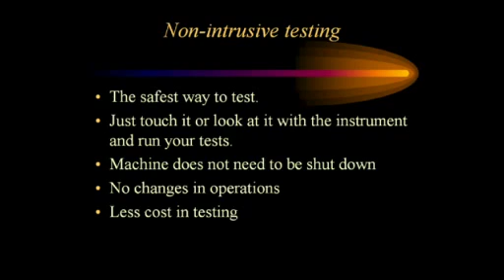I've used ultrasound in every one of these applications. Now, I'm not going to sit here and bore everybody talking about every application, but you can see by thinking outside of the box and thinking what could be there, you start to hear things and you start to see things that you haven't been able to do before.

Compressed air leaks - the biggest bang for your buck with ultrasound. I can go into a plant and pay for the survey, pay for the whole predictive maintenance program. In a lot of cases it can be paid for just by fixing their air leaks, the money they will save. Biggest bang for your buck. I would really recommend somebody really look at that one hard.

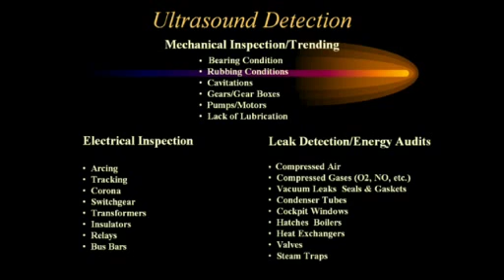Bearing monitoring, condition monitoring, bearing rubs, pump cavitation, gearboxes, pumps and motors, lubrication - it just goes on and on and on. And once you start to think and start to imagine things outside of that box, a lot more of these things open up to your mind to see what's going on. Whoops, went one too far.

So there are some things in our programs that we install in facilities that we recommend they do prior to hitting the start button. The first thing we want to do is pull the grease tubes out of the motors and verify that the motors have been greased. In today's world with EPA and environmental protection, most motors are shipped dry. Now, the motor company doesn't tell you that. And there's a reason they ship dry.

Some people are using a moly-based grease, some people are using a poly-based grease. Those two, moly and poly, don't get along. The two of them mixed together form an acid that will eat the race out of your bearings in 3 to 5 years. So we don't want to mix the two. So to get rid of the problem of mixing the two, motor companies don't grease the bearings.

Consequently, in the last 6 months, I've found 50 motors that we pulled the grease tubes out of - they're dry, they're empty. People get a new motor or a rebuilt motor, they take it off the crate, install it, align it, hit the start button, assuming it's a brand new motor and ready to go. Well, it's not. We have to make those motors ready for service.

Very, very important - the next thing is a shaft run-out test. We take a dial indicator, a magnetic stand, set it up on the shaft, and roll that shaft over from the keyway all the way around to the other side of the keyway. If that dial indicator moves more than 0.003 of an inch, we will not accept the motor. The shaft is bent, or it's not in there straight, or something is wrong because it moves more than 0.003 of an inch.

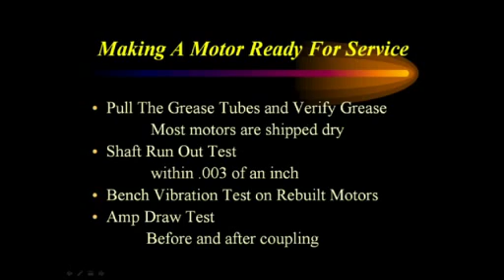Some of the problems that can be detected with infrared or ultrasound: soft foot. For those who don't understand what soft foot is, the plate or base that the motor sits on is supposed to be milled even, and the feet on the motor are milled even. Well, sometimes you have a three-legged stool — you set a motor down, and even though it feels solid, there's actually a little bit of a raise on one foot or the other. So what we do is take dial indicators and find that soft foot. The next slide will show us that.

Then there's misalignment. Misalignment is very, very important. We talked earlier about 3/1000ths of an inch. Most business cards, if you put a mic on one, measure about 6/1000ths of an inch thick. So just think about that — center line to center line on alignment has to be less than half the thickness of a business card, in fact, because we want it inside of 3/1000ths.

Okay, we're going to look at some greasing problems today. One of my biggest pet peeves is greasing, and you will see that today. We're also going to look at some mechanical looseness, maybe some cavitation in a pump, and some competing noises that we will find. So let's move on.

This is the soft foot. This was found with ultrasound and infrared. Ultrasound, we looked at it first. What we heard actually was — I'm going to play it.

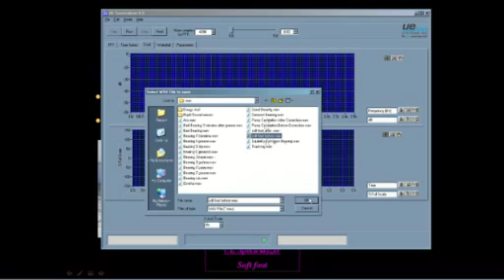Okay, we're going to play the soft foot before it was corrected. I want you to watch both screens and listen for the surge — you'll hear the surge in the motor running. Okay, here we go.

Okay, that's the surge in the motor. You could hear it, and you could also see it in the time domain — you see them getting bigger and smaller, bigger and smaller.

What happened — and I think most of you can see my mouse moving — this foot right here, the front foot on the right side, we put a dial indicator on the base and another on that foot, loosened that bolt, and that foot raised 0.010 of an inch when we loosened it. So we tightened it back down and went all the way around. The opposite corner, caddy corner across, also raised 0.010 of an inch. So basically, when we bolted that motor down, we put a twist in the case.

Now the twist in the case is noted right here — you see the heat in the motor? The tolerances inside that motor, between the rotor and the stator, are so small that a little bit of a twist in the case shows up pretty quick. You also hear it with the surge in there. Okay, this motor is too hot, and the hot spots are showing up in it.

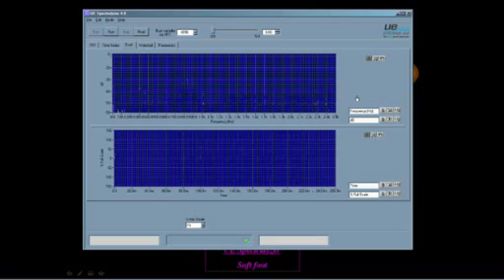So let's go back to our Spectralyzer and stop this one, and I'm going to play it after we corrected that. Now, for the correction, what most people would think is that you put 0.010 under that one foot. Well, that's not true — we put 0.005 under the front one, and go caddy corner and put 0.005 under it, because remember, the motor's tipping. That way we took it down square.

Now listen to the sound of it now.

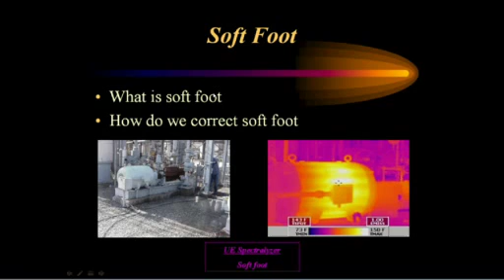This is a $23,000 motor, 2,300 volts, 300 horsepower, and it runs a 15-stage pump going into a pipeline. Very expensive machine that was fixed with two 5/1000ths shims. It's pretty prominent, pretty big deal.

So misalignment - it's been our experience that misalignment is the second leading cause of premature motor failure. What is alignment? A lot of people say, well, it looks square. I measured from hub to hub, and it's a half inch on both sides. Well, that's not good, that's not alignment. We're talking alignment to within 3/1000ths of an inch.

So what is alignment? We'll talk about that. How would it sound with ultrasound? How would we know that it's misaligned with ultrasound? How can we confirm the misalignment? What damage can be done through misalignment? Is it a hard test? Is it complicated? No. And can it add to the bottom line? Well, when we're talking about shutting down a $23,000 motor and a $150,000 a day pump, it certainly can add to the bottom line very quickly.

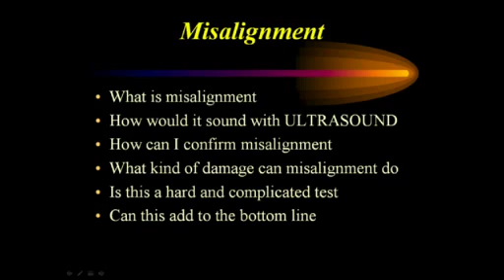So let's look at misalignment. Misalignment is when two separate machines are coupled together through a coupler, and the two shafts are not aligned to within 3/1000ths of an inch center line to center line. This places undue stress on the inboard bearings on both machines and severely shortens the life of those machines.

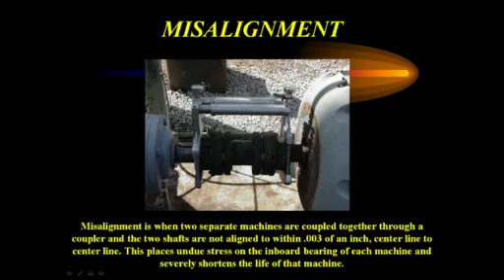For the sake of terminology, looking at this machine and the two bearings we see - this one here is the inboard bearing on the pump, this is the inboard bearing on the motor. The outboard bearing is where the fan is. The outboard bearing on the pump is where the impeller is. So the two inner bearings are the inboard bearings, for sake of terminology. Usually we have two inboard points.

How are we going to know with ultrasound? If we take an ultrasound reading on the outboard bearing of the motor, then one on the inboard bearing of the motor, then one on the inboard bearing of the pump, and outboard of the pump, the two inboard bearings will be noisier or louder than the two outboard. The reason for that is the stress we're putting on it through that coupler, because those two shafts are not aligned properly.

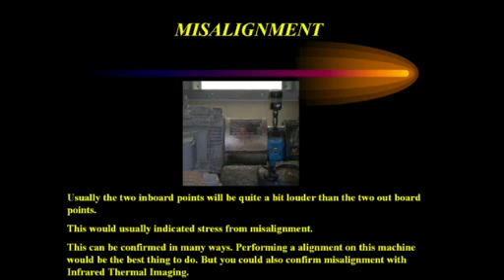How are we going to confirm it? Somebody's not going to just say, yeah, you're listening to it - there's no way you can tell. Well, we have other options. We have infrared, we have vibration, or we can simply realign the machine. There's several different ways that we can confirm what we're looking at. What we're going to do is use infrared.

We see here, this is the same machine. Notice the stress that's placed on the inboard bearings of both machines. Look at the heat here - the lighter the color, the hotter it is. So the stress on the inboard of both of these machines is tremendous. It's like trying to turn a hinge over - you've got it in a bind, and all the stress goes out that shaft straight into those two bearings, because that's the first give point. So it very severely shortens the life of this machine.

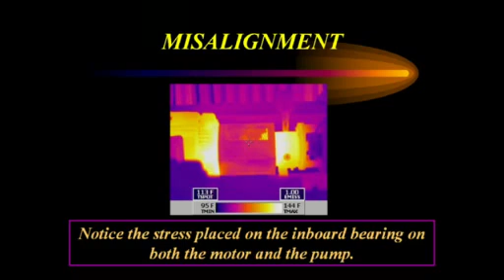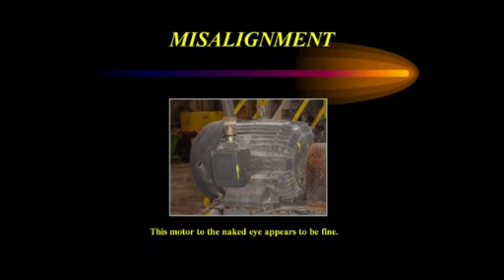Let's look at this one. This motor, to the naked eye, appears to be fine. Nothing wrong here, it looks good to me. Put ultrasound on it - the outboard bearing was quiet, the inboard bearing was very noisy. And going on across to the pump, the inboard bearing on the pump was noisy. So let's look at it.

Here we go. In testing with ultrasound, confirming with infrared, there's severe misalignment. Look at the stress put on the inboard bearings here. Look at the heat that we see on both of these bearings because this coupler is out of alignment.

There's several ways to align machines. Personally, I like reverse dial. Most people like lasers - laser alignment is fast, it's quick, it's accurate, it's very good. But I'm kind of the old turn it with my hands, screwdriver and wrench kind of guy, and I like to, if I have enough time, pull them down to dead zero.

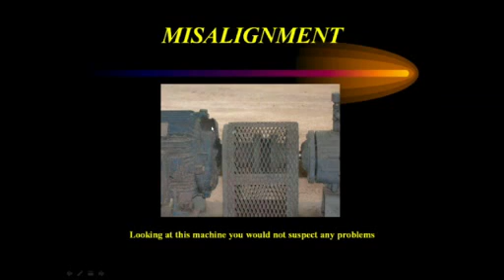Let's look at this machine. It looks like there's nothing wrong with it at all, except the bearing is hot. We can tell this bearing is hot because of the grease. Look at the grease running out of here. That's a telltale sign already, and we'll talk about that in a little bit. But this machine looks like it's okay.

Well, let's look at it under infrared. We see the stress on the inboard bearing here, the stress on the shaft getting hot here. Look at this. This is a Martin-style coupler, the one that has the little rubber gear in the middle.

Everybody's taken wire and bent it back and forth till it breaks. It gets hot. That's movement of the molecules. It's weakening it. That's exactly what's happening here. You have two hubs working that rubber, squeezing it, compressing it, letting off, compressing it, letting off. It just heats the rubber up. This is severe misalignment. When it starts making the rubber in the coupler hot, it's a bad deal.

So here we go, misalignment. Now we've proven misalignment with ultrasound because the two inboard bearings are louder than the two outboard bearings. We've also confirmed it with infrared. Vibration is going to show us the same thing.

If we go out to vibration, we show spikes on an accelerometer at 1 to 2 times running speed. Again, another indicator of misalignment. So very, very important, and it all starts with that shaft run-out test when that motor comes into the plant.

Very, very important. Look at this machine. There's not a problem, obviously it's got a few leaks. We can see where some process has been leaking out of it. And they just keep replacing, just keep replacing.

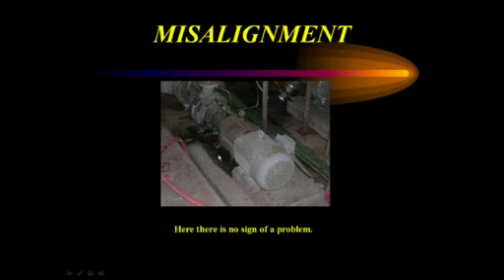Well, if we look at it now, we can see what happens. Look at the stress put into that pump from misalignment. This machine failed 3 days after these tests were run. The manager had the reports but chose not to use the information. It led to a plant shutdown, and of course, that was not planned.

Very, very important. Misalignment is the second leading cause, I stress that, the second leading cause of motor failure. I have actually aligned motors that you couldn't turn the coupler over with a pipe wrench. When we got done with alignment, you could lay your hand on top of it and let it fall off, and the motor would coast down to a stop because you've taken the stress out of those inboard bearings. It's very, very important.

Okay, so let's move on. Misalignment. Testing for misalignment is very simple. You must test the outboard and the inboard bearings for each machine. If the two outboard bearings are significantly quieter than the two inboard bearings, then we have a very good indicator of misalignment. If you suspect misalignment, try to confirm it with another technology such as infrared or vibration, or just simply realign the machine.

It doesn't hurt. Doesn't hurt. Machines will settle and move over time, so just because it was aligned to start with doesn't mean it stayed there. They will actually rise with heat, so they may be moving into misalignment. That's something we also need to look at.

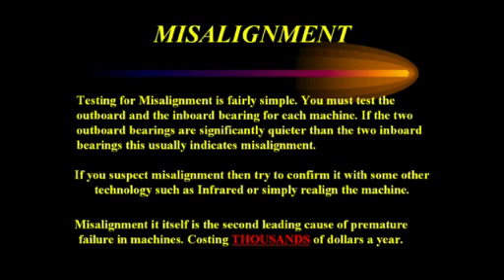Misalignment itself is the second leading cause of premature motor failure, and it costs thousands and thousands of dollars every year. It's one of my second pet peeves, I would think. So, if misalignment is number 2, what is number 1?

And we'll go from here, and I have this for anybody. Usually this is the live deal, but if somebody out there wants to raise their hand and guess it, we'll give them credit for it. But we'll just move on.

Improper lubrication. Improper lubrication is the leading, bar none, number 1 cause of premature failure. How much grease is enough? How do we know? How many of you know how much grease comes out of your grease gun in one stroke? Not very many, because nobody pays attention to it.

What we recommend is, if you have nothing else, take a 1-ounce shot glass and count how many strokes it takes to fill that shot glass. If it takes 10 strokes to fill that shot glass, then 1 stroke is 1/10 of an ounce. It's pretty simple. Now we've found a way of measuring how much grease we're putting in there. How often do we grease? The book says we should grease every 3 months, whether we need it or not. Well, I disagree with that.

If I've got a motor sitting here running 24/7 under loaded conditions, and another motor right beside it that runs 2 hours a day under loaded conditions, the book says grease both of them every 3 months, whether it needs it or not. Well, obviously that's wrong. You're going to over-grease the motor that runs 2 hours a day and probably under-grease the one that runs 24/7.

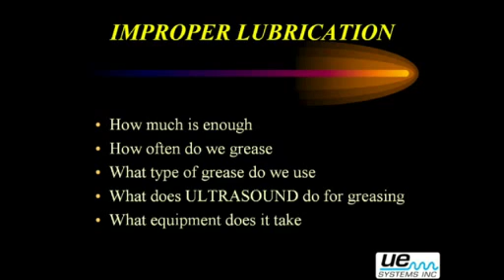The equipment it takes, I use the UltraProbe 10,000. There are other mediums to use - UE Systems has the Grease Caddy, and they have other ones. I don't even consider anything but the UltraProbe 10,000. As far as I'm concerned, there's not another machine in the country. I won't use anything but that.

But let's look at this. How many of us have seen this around motors? What's happened here is this motor's overgreased. Now, what happens when we overgrease a motor is as the bearing turns and the balls rotate around the race, it forces the grease to the outside. That makes a tunnel if we've overgreased, and now the grease becomes an insulator because it can't get the heat away. Once the grease becomes hot enough to break down the base, the moly or poly that's holding the oil or lubricant in the grease, then it slings it to the outside.

Once it slings it to the outside, we start to see leaks around the end bells right here. We start to see it drip from the shaft seal, and we start to see a motor heat up. Well, that's what happens when we overgrease a motor.

Contrary to what a lot of people believe, electricity does not run through the wire - it runs around the wire. That's why when we put an amp probe around the wire, that's what we're testing, is that magnetic field. Insulation on wire is not to keep you from getting shocked. It's to direct the flow of that current.

So if we overgrease this motor, and that grease gets back into the varnish and the windings on the motor, the grease breaks down that varnish or insulation. Now the current's not going the right direction - it's jumping all over everywhere. So our motor loses power, RPMs go down, the motor starts to heat up, and it starts dripping grease. What's the first thing we do? We put more grease in it. And that's what killed it to start with.

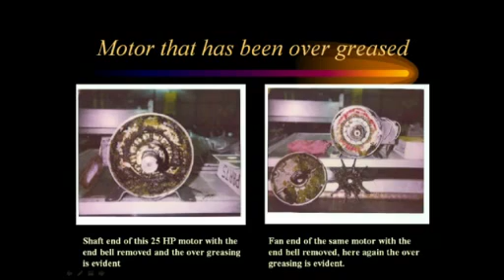Now, I thought he was giving me a line, but he wasn't. There's that 25 horsepower motor. Look at the inside of that motor. No wonder it was heating up. No wonder it was losing power. Look at the grease inside of there. It's amazing, and we find this every day. Every day. This one is not bad.

Look at this one. This is a 60 horsepower motor that's running a paint vat in Wichita, Kansas. I got a couple things to say about this one. Number one, this guy would no longer be working for me. After about the 7th or 8th tube of grease, somebody needs to ask the question, where's it going? Obviously we can see where it was going.

The second thing is, and this is a real problem, notice this bearing. That's a shielded bearing. Grease can't get in that bearing if we wanted to. So what happened here? Why does it have grease zerks in it? I asked him. He said, well, the new motors we got didn't have grease zerks in, so we pulled the plugs out and put grease zerks in them. They did that not knowing that plug is a signal it's a shielded bearing. So they put grease in this motor and never touched the bearing. So they lost the motor.

This is something we've got to really be careful about. If it doesn't have grease zerks in it, it probably has shielded bearings. Brings up another point: I will not accept a motor with shielded bearings in it. I want to grease my bearings.

Even if the bearing has started to go bad, if you can grease all day long, you can't baby it through till shutdown because you're at the mercy of the shielded bearing. I want my bearings open where I can grease them. Even if it goes bad and I have to stand a man there and put a shot of grease in it every 5 minutes until I can get to a scheduled shutdown time, then that's what we'll do. But at least it gives me that ability to baby that machine along until I can get to a scheduled shutdown. Very important. I will not accept shielded bearings because I grease with ultrasound, because I grease the right way.

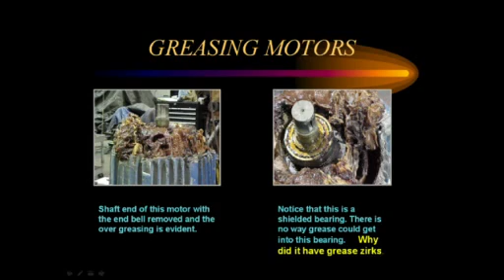Let's grease a motor. This is a 100 horsepower motor running a 1,500 gallon a minute pump, and we're going to grease it. So we're going to look at this wave file. This is the baseline. Listen for the crackling and popping in the bearing. That's the grease separating. Okay, here we go.

Now you can see on the time waveform and the spectralizer, it's really a pretty clean image. There's not a lot of high peaks or spikes in there. The noise is in the time wave domain because you can hear the bearing, the grease separating and popping.

Okay, well, let's grease that machine. So now this is why we grease with ultrasound. There's no question about what's going to happen here. Okay, listen to it this time.

I don't have to say any more. That sells it all right there. You can hear the grease hit the bearing. The thing ultrasound's going to do is it tells us when the bearing needs grease. It tells us when it's got enough grease. We will never over-grease another bearing. It's that simple. It's just that simple.

You could see the noise come down. You could actually see it lowering itself. The white bar across the time wave domain, all the spikes are gone. The bearing has been properly greased.

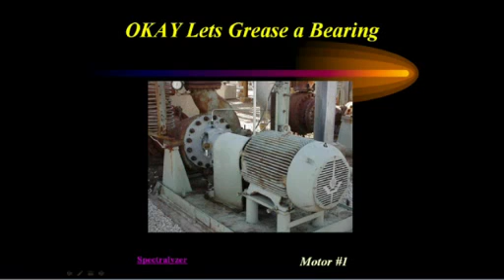Well, let's move to another one. Let's see if we can find another bearing here we can look at. This is a 600 horsepower motor. So let's listen to motor number 2 and see what it sounds like. So we'll go to the wave file here. And I might also say, while I'm on here, these wave files and this whole program are available online. So this is the bearing when it's dry.

Again, you can see the spectralizer is a fairly clean image. It's not got a lot of big spikes or high spikes. And look at your time waveform again - a lot of clutter, a lot of dirty stuff in there.

Okay, let's grease this one. I have to warn you, the grease hits it pretty quick on this one, right near the end. So listen pretty close, and we'll see if it quiets down for us also.

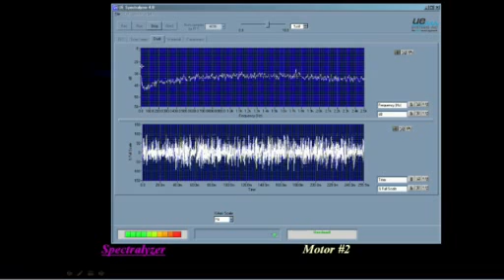You notice in that one, it took a little longer for it to quiet down. It's a bigger motor, took a little more grease. And the other thing, at the end of it, you could hear the clutter kind of go away and then come back, go away and come back.

This is the first time we run that machine. It had not been greased. Remember we talked earlier about the balls pushing the grease to the outside? That's exactly what took place here. As we put new grease in it, the old grease was dry and crusted, and we had to force it on through the bearing to get it to quiet down.

You still see in the time waveform there's a little clutter there now and again, but that's the old grease working its way through the bearing. This motor finally quieted down to where it sounded like air escaping, the way they're supposed to.

Again, a perfect reason why ultrasound should be used to grease bearings. There's no other way to grease a bearing. There is no other way, just that simple. And that happens on big machines.

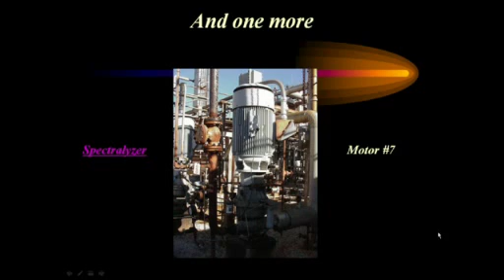So in the interest of time, I'm not going to go through and run all these bearings, but I wanted you to understand and see perfect examples of what using ultrasound to grease bearings will do for you.

Well then people say, how should a motor sound? You showed me some bad ones, let me hear a good one. Okay, well we have one. So let's bring the Spectralyzer back in.

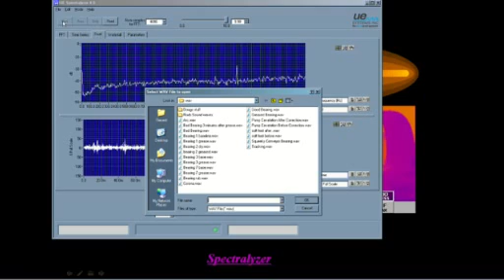Also, you might notice we're using Spectralyzer 4, which is now available online. Everybody should get a hold of that and use it - you can see the advantages. Listen to this one, this is a good bearing.

Okay, you can see I had the volume turned way up on my recorder, but it's clean. It's symmetric across at 100. Look at the line on the time on the Spectralyzer.

Let's switch it back to the Spectralyzer, and I'll run it again so we can see how clear it is. So you can see the line there - that's a pretty clean line.

Notice how it sounds like air escaping. You take an air hose and just push the button, and that's the way it should sound because it should be smooth, no noise in it. So those are the kind of things that we use ultrasound for greasing.

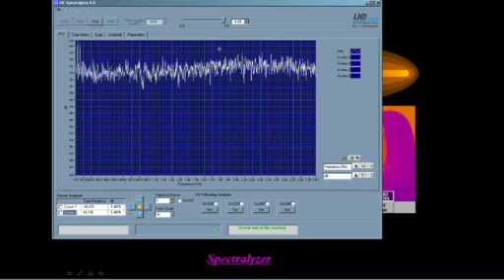Again, there's no other way to grease bearings as far as I'm concerned. The other thing about this motor - Spectralyzer is going to show up here because I shut it off instead of moving over. The motor's good.

We don't know what it is yet. Could be misalignment. This happens to be a belt-driven machine - we may have the belts too tight. Could have soft foot on this motor. There's several different things, and that brings up a point.

Soft foot is very seldom ever checked on belt-driven machines. How do we know that base plate is square and level? We don't. We should always check those machines for soft foot, but we don't. People just don't do that because it's belt-driven. It's very important, soft foot.

When we start this motor, when it actually gets up to running speed, it finds a magnetic center up and down. That's where it runs. It also moves axially as much as it can to the magnetic center to run that machine. Actually all a motor is, is one magnet chasing another one. So once it gets to that magnetic center, your bearings are unloaded. There's no reason they should be hotter than the center of the motor, unless we have a misalignment, a dry bearing, a soft foot—we're putting stress on the bearings of some nature.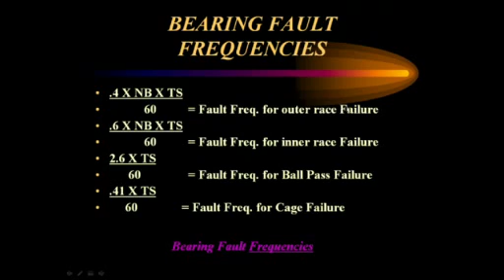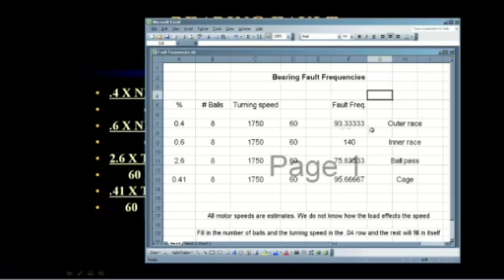If I bring in this little spreadsheet that we've made, and take 0.4 times the number of balls—let's say this is a 318 bearing we're going to use, and I know it's got 8 balls in it—and the tag speed on the motor, on the tag it gives you the RPMs. Well, this one happens to be 1750. So if I enter that, then my fault frequencies are automatically calculated for me: 93.33333 is going to be my outer race fault frequency. Let's remember that number. I'm going to move this out to the side for a second.

We're going to move this over and look at a motor. This is an actual case scenario that I had in a town about 60 miles from where I live. It happens to be an ethanol plant—this is the number 5 circulator pump. It's a 100 horsepower motor.

If we look at the inboard bearing on the infrared, if we look at this small little cross right here, that cross is that temperature. So we already know the inboard bearing on this thing is pretty hot—195 is pretty hot. Also notice that it is hotter than the center band on the motor. We got a bearing problem.

That's simple, so we start checking. New bearings cost us about $3,000. By the time we get them in and everything back up and running, we're about $3,000 in cost. A new motor—I talked to the manager of the plant, he said about $6,000, and a new motor was a week to 10 days delivery. So repairs on a planned shutdown, we could get it done. High side, we're looking at $6,000 to $8,000.

Well, that's a bad bearing—we know it's a bad bearing. Let's play it, let's listen to it. We're going to go to File, open it up here, and play that bad bearing. Now I want you to listen to the tonal quality. Remember, we're listening for air escaping, right? Listen to the bassy sound in this machine. Okay, here we go.

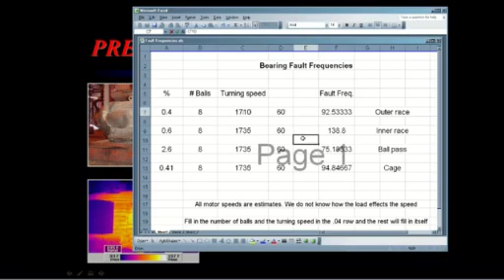So let's change this to 1735 and see where we go. Well, now we're at 92. Let's drop it down a little more. Let's go to 1710. Whoa, 91. Is that amazing? Look at this, 91.

Inboard bearing, the race on the outer race on that bearing is in failure. It's that simple. Cut and dried. No way around it. It's got to be the outer race on that bearing is in failure.

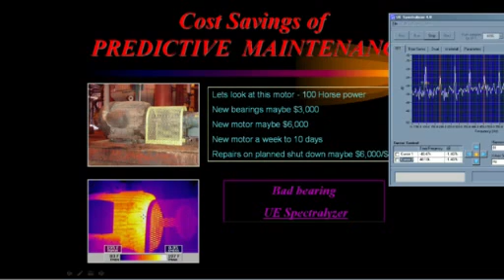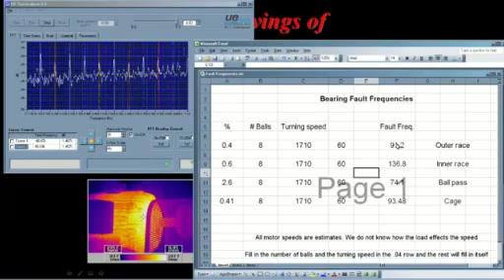Look at our spikes. Look at our outer race failure number. I'm going to bring this over and put both of these on the screen where we can see them. Yeah, here we go, 91. Look at our outer race failure. Dead on 91. It's cut and dried. It doesn't take a rocket scientist to see what we got going on right here.

So I tell the manager of the plant, we got to shut this down, we got to fix it. He said, no, you don't understand. Plant makes $35,000 a day. We cannot shut this machine down.

Well, this is where predictive maintenance gets tough, because I can show you all the data. I've just shown everybody here all the data. I can lead you to the water, but I can't make you drink it. I can show you what's wrong. I can prove to you what's wrong. I can do it with ultrasound. I can do it with infrared. I can have you listen to it. I can have you look at it. But I can't make you shut it down.

Somebody's got to make a decision. In this case, if somebody doesn't make a decision, the motor will make the decision itself. It's going to be at 2 o'clock in the morning when there's no staff here and there's 4 foot of snow and the wind's blowing 60 miles an hour. It never happens at a convenient time. It always happens when we're pushing it the hardest and using it the most.

How many people ever lost a motor? Now be honest, how many people ever lost a motor when they did not need it? It don't happen. It always happens when we need it the most and we're pushing it the hardest. So he says we're not shutting it down. So let's let it run to failure. Okay? So it runs to failure.

The plant makes $35,000 a day. Let it run to failure, and you've got 10 days waiting on a new motor. 10 times 35 is $350,000 in lost production. And ladies and gentlemen, I'm telling you right now, you cannot get lost production back. You're already running at 100%. You can't run at 130. You're running as hard as you can go right now. So lost production is just lost production, product out the back door. You don't get it back. You lost it. That's a $350,000 loss straight away.

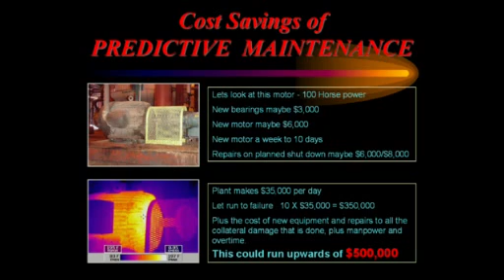This is what predictive maintenance, ultrasound, and infrared will do for you. This is the silver bullet. Now, people I've heard talk before say there's no such thing as a silver bullet. I contend that they are wrong. This is a silver bullet, and I'm going to show you how to use that. We've got a few minutes left, but before I do that, I want to show you one other thing here.

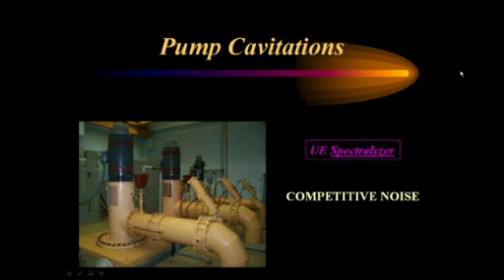We talked about competitive noises. This is a brand new installation in Fort Collins, Colorado. It's the water treatment and city water services, and they didn't know they had a problem. We went in and set baselines on all these machines. These are vertical pumps, and you can tell they're pretty high, and they're very high dollar pumps. So this pump right here is the one giving us the problem. I'm going to stop this, and I'm going to play it when we first listen to it. Listen to this ugly one. Let me get rid of that. Okay, here we go.

Now that's scary. That was down on the pump. It wasn't the motor, it was down on the pump. And I can tell you, when I heard that, we started backing up. It was scary, that's ugly. But what we listened to there is cavitation. It sounds like mechanical looseness, but it's cavitation. What I done was I moved to the discharge on the pump, and I actually closed the discharge of the pump down a half a turn on the discharge, and it made this difference. You can see the difference there. We saved that pump, there's no question about it. No question. That pump would have just beat itself to pieces.

So now the plant operator says, well, yeah, but you've shut me down a little bit. My efficiency's down because you closed that valve down a half a turn. Well, it comes down to cavitation is gas or bubbles, or it's trying to pull it through there faster than it can get it. So he can run wide open at 80% efficiency, or he can shut it down a half a turn and run 100% efficiency. A lot of dollars been saved here. That's the difference. Those are the things that ultrasound will do for us. They didn't know that was even taking place because they couldn't hear it. With the ultrasound, we picked it up immediately.

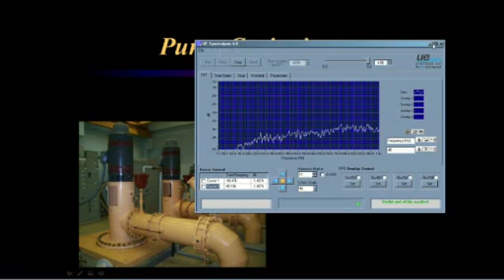Okay, so let's move on. We talked about silver bullets. There's a couple of things in the last couple of minutes here I want to talk about, the silver bullet file. It's been past history that anytime we cut the bottom line in a facility, especially manufacturing, the first place we cut is maintenance, because maintenance doesn't contribute to the bottom line. It's that simple. They protect it, but they don't contribute.

They don't put product out the back door, they're not operations. So what happens is the guy comes in and says, look, we've got to cut the bottom line. Half of you guys have a job, the rest of you guys are laid off, okay? Oh, and I want to also tell you, the half of you that keep your job, you're going to do these other people's jobs, and you ain't going to get no more money. Well, so now we've got bad morale problems. We've lost half of our people, we've got to do twice the work. That's when the maintenance manager needs to stand up and pull out these silver bullets like the one we just showed for $500,000. Now, you want to document everything. You have to document everything, good ones and bad ones, silver bullets and corroded bullets, okay? We keep them all in the file.

We put the average ones in the middle, the good ones in front, and the bad ones in the back. I'm not going to show him the bad ones unless he asks for them—I'm going to show him the good ones. So when he lays off half of my crew, I'll pull these silver bullets out and say, look, here's the $500,000 we potentially saved. Here's another $125,000. Here's another $125,000. There's $800,000 we potentially saved this company this year. Tell me another department in this plant that does that. They can't do it. So now we have some leverage. I can go to that man and say, you can't afford to lay my people off—look at the money we saved here. In fact, you need to let me hire more people so I can save you more money.